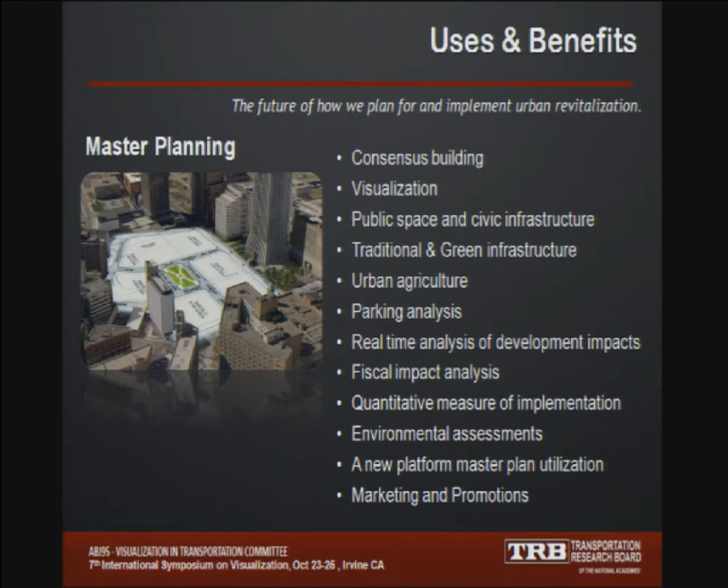So some of the general benefits of the technology. Obviously, thinking from a big picture, master planning is an incredible tool for many different reasons. One is it's more of an interactive and interpretive program. Einstein said, if I can visualize it, I can understand it. This certainly is the case during the planning process. If I have the ability to combine data into one source, one centric database, in a 3D visual world, I can understand it better and I can plan better. I'm not going to go through each one of those, but you get the idea of some of the benefits with the technology.

I only have a couple of slides left, and then I have more of an interactive presentation, but this is kind of where we were, and I'll show you where we're heading.

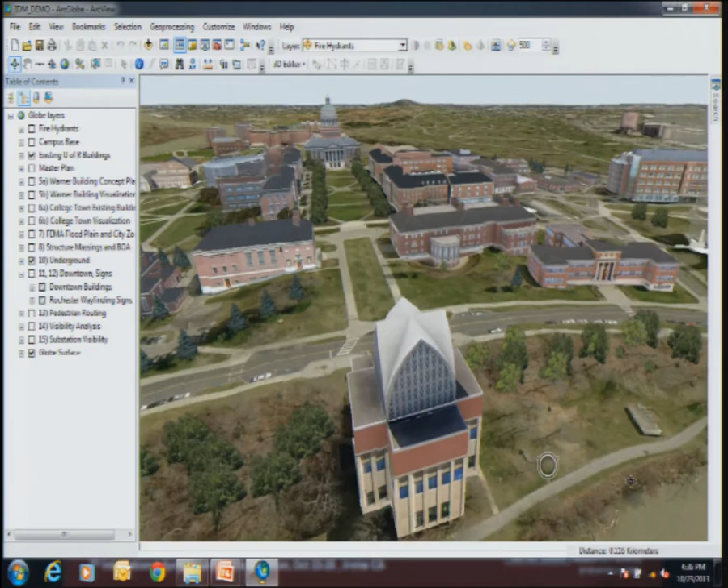I'm going to start off, in this particular case, with Esri's ArcGlobe product, which is how we created this world. This is the campus of the University of Rochester, and I'm going to zoom out a little bit. It's running inside Esri's ArcGlobe program, but you can get it to run in other programs, which I'll show you as well.

So how do you create these environments? I think there's so much data out there available to you to start these. For example, the terrain is from LiDAR, the aerial image the university flew—but for example, in Pennsylvania, they have the PASDA website, and all of Pennsylvania has been flown with LiDAR-based data.

And you have access to that information, as well as aerial imagery. Most states have GIS clearinghouses with aerial imagery, terrain, and so forth. Those are places you can start, and in a lot of cases, the information is free, so you can start at various levels of fidelity, but free nonetheless.

In this case, the university wanted really tight aerial imagery, so they flew it at 4-inch resolution. That's kind of how we make things—we get the LiDAR information, convert it into a terrain model, take the aerial imagery, and drape it on top. In the case of this campus, we're at 1-foot contour for the terrain, just to give you an idea of the fidelity.

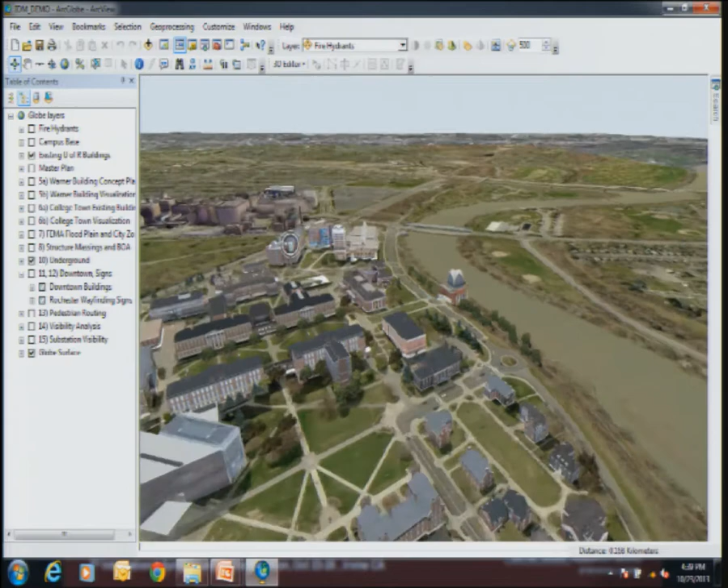So we have this virtual world that we can go around in and interact with. What else can we do with it? Well, if we have GIS information ahead of time, we might be able to exploit and reuse that. In the case of the university, they had a tree planting database—they knew where all the trees were on campus, so we could roll that information into our geospatial, georeferenced environment. That's a fancy way of saying all the buildings and so forth are actually at their world coordinates.

So it's a pretty accurate system as well. So what do we want to do? Besides just moving around like in a video game, we want to use data and see it in a 3D context, for reasons I'll explain, for savings.

Let's go back to that utility mess I explained earlier that most campuses have, and the University of Rochester is no different. They have what almost every university has, what I call the Indiana Jones room. That's the room where all the flat files exist, all the backups they have, all in one room that one guy who's been there for 40 years knows where stuff is. If I asked you to find me a file for this particular pipe and sent you in the room, hopefully you'd come back out. So it's a very inefficient way of storing information, but more importantly, accessing it.

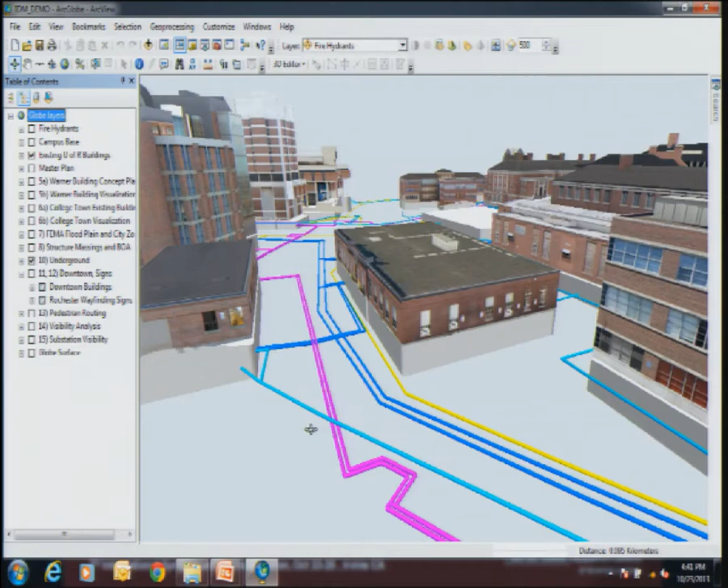I'll give you a brief demo of how that can be resolved. One way is, as I showed you in the slide, here's one section of the campus, and I can turn off the terrain, and we can look under that terrain to see the utilities that happen to be under the ground. But since we're in a database that just happens to be in 3D, we can actually do things with it.

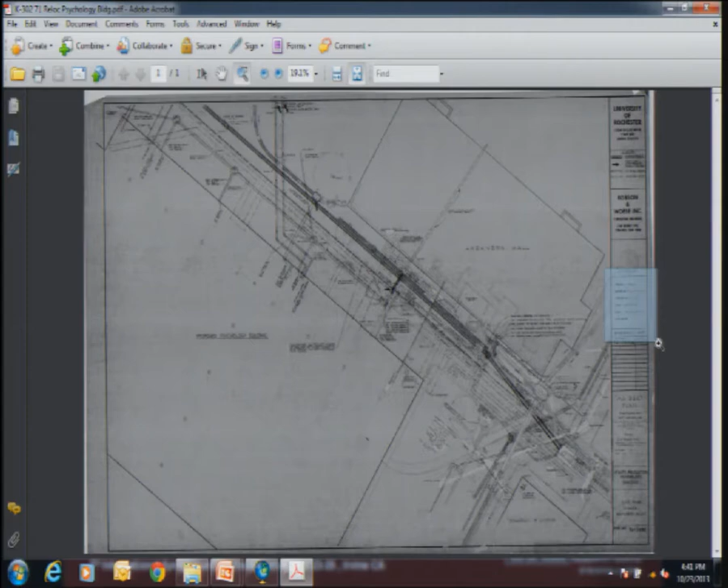I can select a pipe, and it can tell me that's the chilled water supply line. But if we go further down into the attribute table, I can actually select that file from the database and call it up. In this case, I know it's probably a shocking revelation to most of you, but they actually designed stuff before computers. This is a file from 1969.

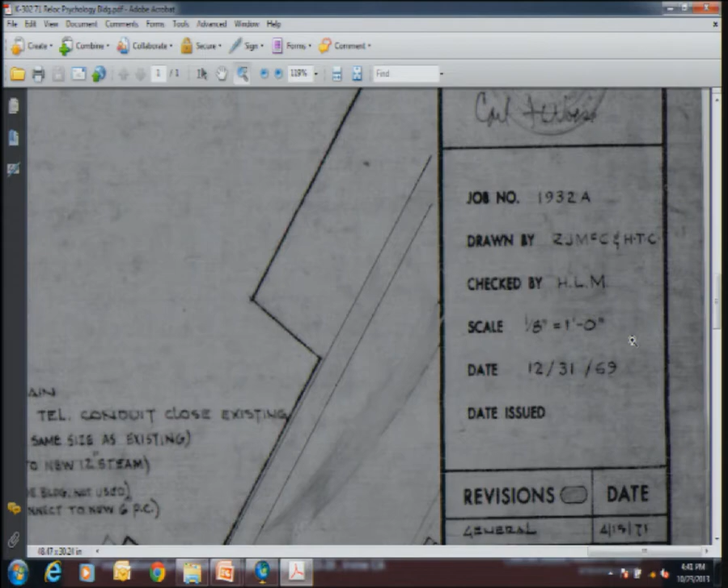So if I had to send you into the Indiana Jones room to find that file, I don't know how long it would take you. Say you were really good, it only took you half an hour to find it. Here, you find it in seconds. But more importantly, if I'm somebody that doesn't know a thing about that room, I can click on something visual and get it. So it's providing information in an easier context for people to access so they can make decisions.

Other examples, just to show you real quick. You don't have to think external either, you can think internal. This is Lattimore Hall, and the same type of thing applies. I can click on a tree, and it tells me that's an oak. I'm not linked to their database, so I can't tell you the last time that tree was maintained, or the thickness of the trunk, or who planted it, but that kind of information is available to them.

The process here, we're using Esri's product because that's what the campus had. They have GIS, and instead of making them buy new software or yet another database, let's just have them repurpose what they already have. But what we want to do is tie all sorts of data into it.

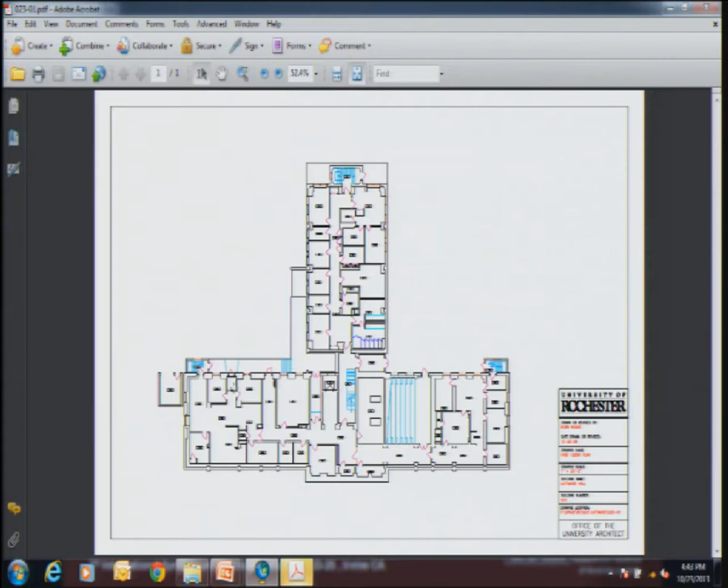That tree inventory came from another database, or in the case of the building here - whoops, hang on, let me get back in. There we go, we got Lattimore Hall, and then what about Lattimore Hall? We can actually drill down in this particular data and go floor by floor if we want. I'm only showing you the PDF, I'm not attached to the database in real time, but I can get CAD information graphically. I might not be a CAD specialist, I might not even be a GIS specialist, but I can certainly get the information as well.

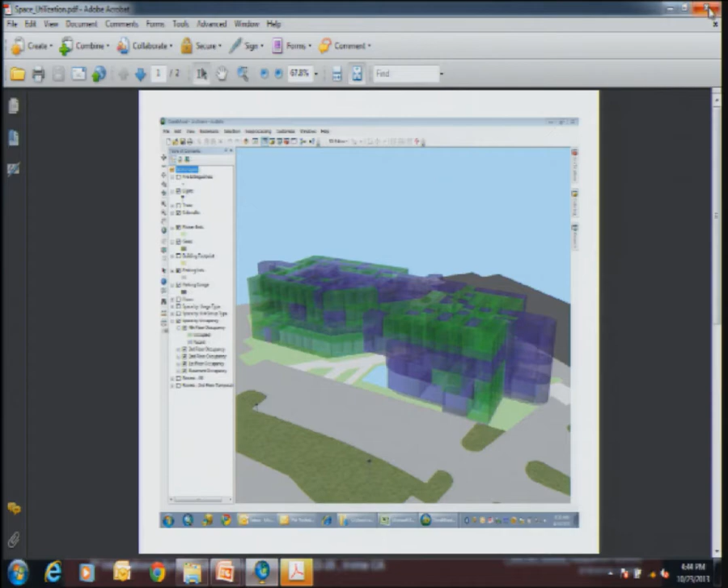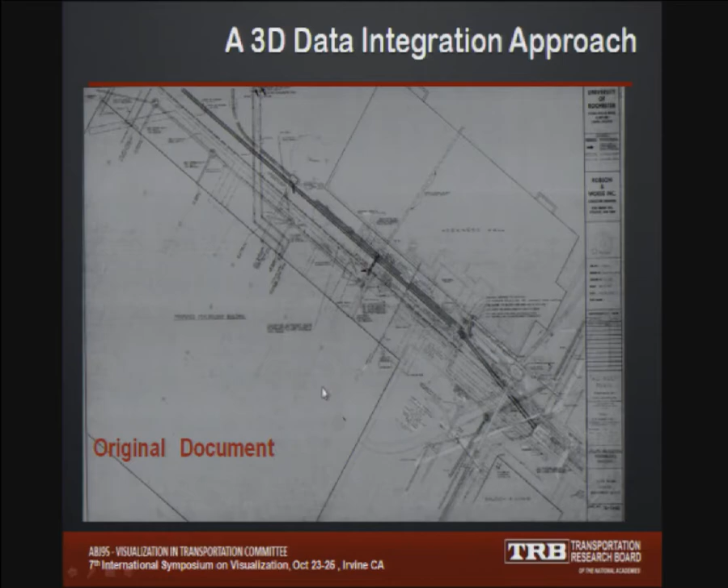I've got hundreds more examples here, but I'll start repeating myself if I keep showing this. So let me challenge you one more time. This is using ArcGIS, which is a fantastic program, especially if you're a GIS person, because you need that software loaded on your computer to run it.

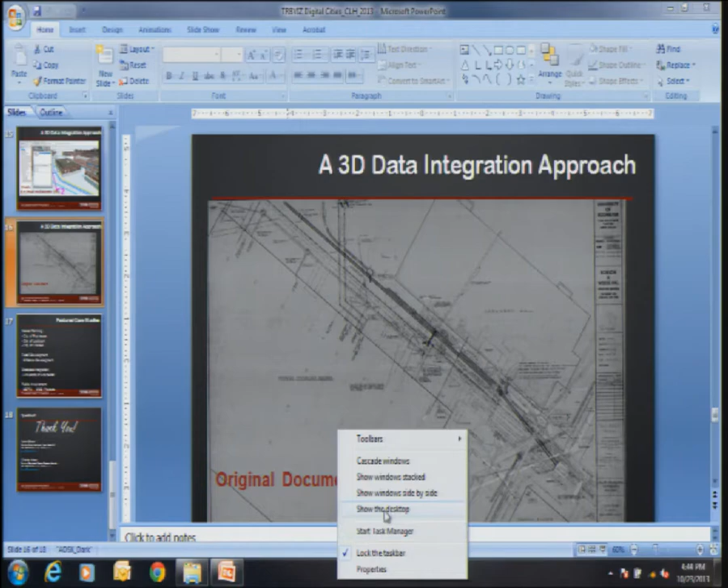You probably need to be trained on it. What happens if you don't have that software? How do I access that information? There's several ways to do it. One way is to take all of that information and take what I'll call a 3D GIS snapshot in time, and then import that into a gaming application. In this case, I'm going to call up Unity, which is a popular gaming tool used by most game developers.

And I always tell the story of the thumb people out there. Does anybody out there know a thumb person? Let me introduce you to one. I was with my son touring college campuses, and we were in the mechanical electrical class, and the professor made all the students leave the room, and he asked one question of all the parents: you're in an elevator, you're on the first floor, how do you get to the 8th floor?

So I know I could ask all of you, how do you get to the 8th floor? So somebody show me how you get to the 8th floor. There you go, give that man a dollar back there. He pointed - that's what you do. You point and you go to the 8th floor.

So he made the students come back in the room and asked the same question, and 90% of the students did this: they pushed the button with their thumb. And that was his point - you need to think differently for this next generation. You need to design differently because they're thinking differently. They grew up on their phones, little iPads, or Nintendos. So think like a thumb person. All of this technology is addressing how they have grown up.

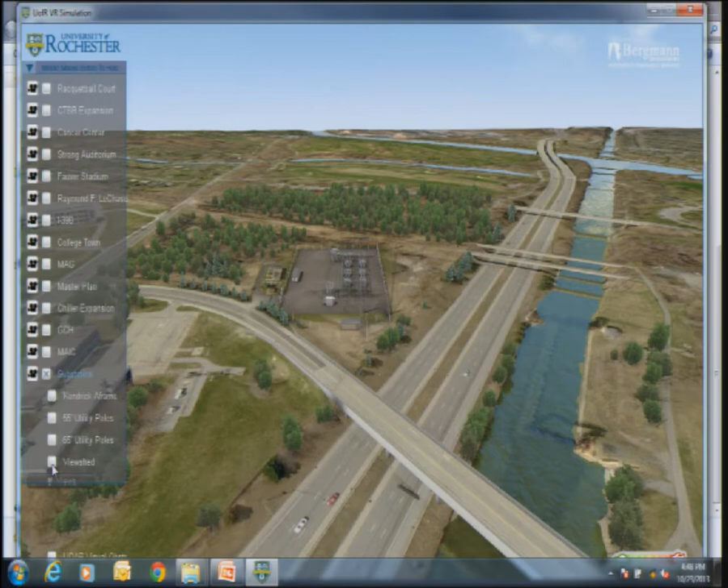But some of the amazing tools provided in a GIS world is to do viewshed analysis - where do I see these types of things? So again, I didn't do the assessment in this package, but I can see the results that were done in GIS. Everywhere in yellow is where the impact of that substation will be.

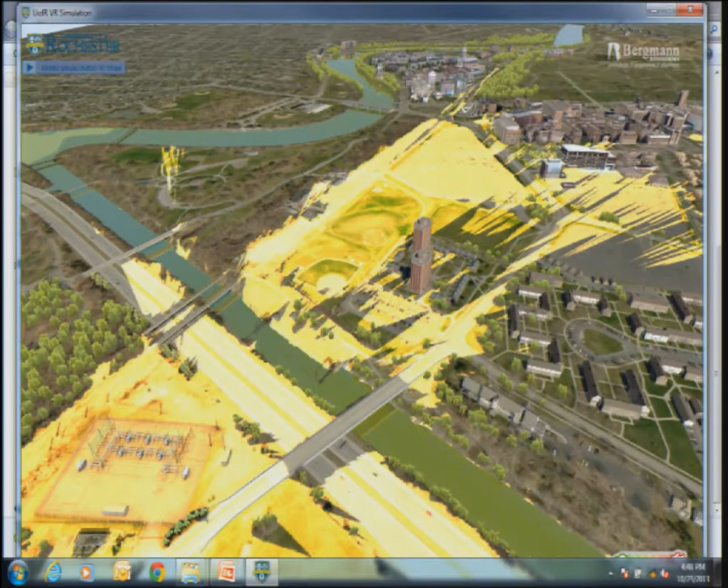And if you look, there's some buildings that really get impacted, but not a tremendous amount. But again, we're thinking macroscopic - we're in a big world, but we're thinking beyond today, we're thinking tomorrow. And if I overlay the campus's master plan on top of this, you can see there's far, far more buildings impacted by this substation than previously.

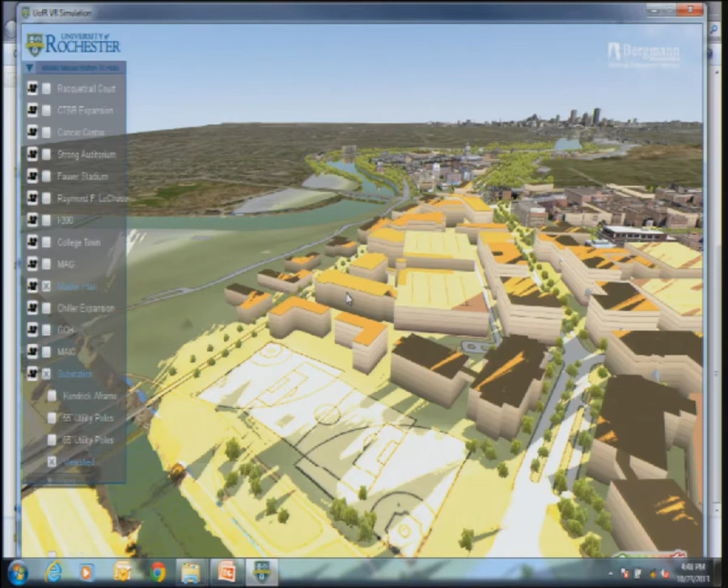Again, big picture - we're getting to see lots of different data at the same time, so we make better decisions. We don't do rework, or in the case of this, the university convinced the utility to bury the substation so you didn't have to see it.

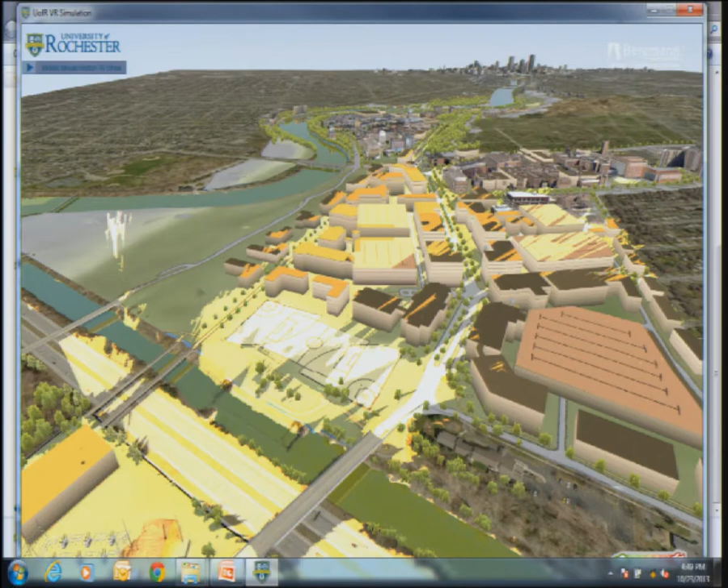Again, getting tools in front of the people that truly need them, which are decision makers, stakeholders, all of those people. I personally, and I know Kevin's the same way, we don't want to change the way anybody works. We just want to change the way your work is seen and interacted with as well.

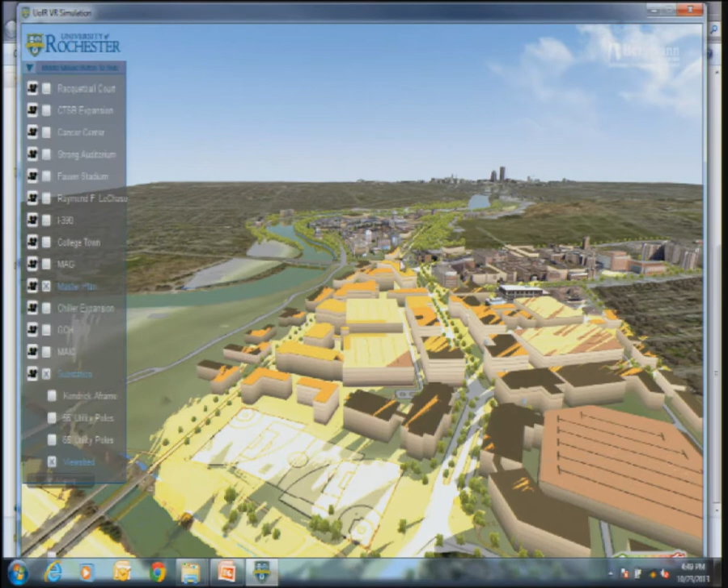Oh, I forgot to connect to the network. So I'm going to try one last live demo here. Hopefully it doesn't blow up. Let's see if it works.

Okay, I think it's going to work here. Hopefully I'm on the internet.

Bear with me. Say you don't have Unity or somebody that knows how to write that code, but you need stuff to be conveyed over the internet. Esri does have a product called City Engine, which I referenced earlier. City Engine is a rules-based program that allows you to...

Oh shoot, I can't run it. I'm not connected? What the heck? Oh hang on a minute. Bear with me, Kevin, talk for a second. Entertain them. Whoa!

Before you go on City Engine, what was the export format you're using for the 3D models in Unity? FBX is what I brought into Unity.

The way these environments are created, by the way, to go back to Pat, you could use existing stuff - we use CyberCity or Pictometry. We can bring in SketchUp files, 3D Studio Max, MicroStation. It doesn't really matter anymore, and that's the real world out there. There's an amalgam of many products that you're using. If you pick a roadway, you're not doing everything in MicroStation - you might be using MicroStation and some other add-on apps as well. And to me, that's the real power of it.

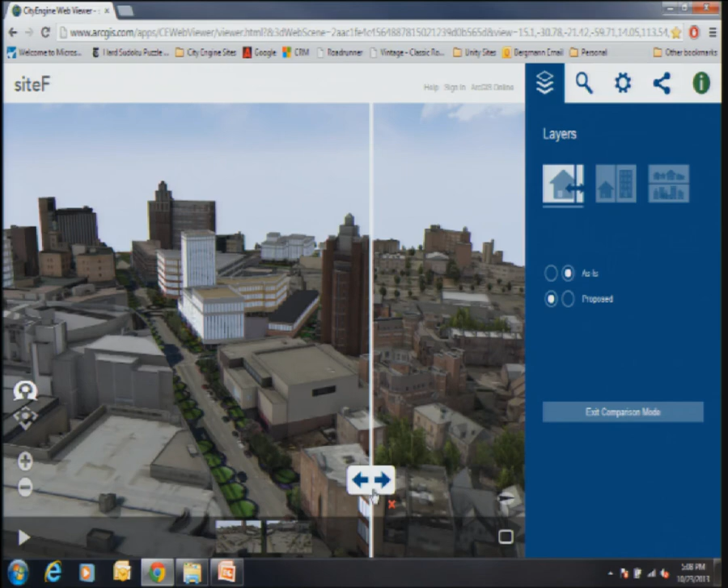Where can we find the URL for that? As you can see, it's a long, complicated way—but Terry's here. If you go to Esri.com, they have a City Engine site with many different demos you can look at right now. There's also a lot of rules you can find within that website. If you want any of mine, just come see me afterwards and I'll give you all the links you can handle. Or just go to arcgis.com and type in 3D, and there's a whole bunch of demos you can access quite easily.

There you go. All right, I'll shut up and let you talk.

Okay, you want to move your computer too, or is that easier? Yeah.